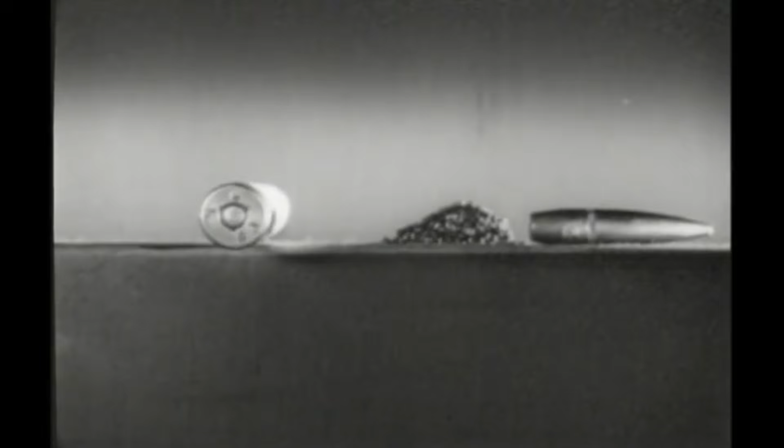This is a cartridge, the type of ammunition used in most small arms. It consists of a metal case, a bullet, a powder charge to drive the bullet, and a primer in the base to start the powder burning. A sharp tap with a pointed instrument will explode the primer, ignite the powder charge, and drive out the bullet.

To control this powerful explosion and direct the bullet toward a target is the purpose of all small arms weapons. The term small arms includes shoulder weapons, hand weapons, machine guns mounted on ground tripods, on vehicles, and planes. Some are comparatively simple. Others are complex, but there is a basic similarity which runs through them all. Since they all fire the same type of ammunition, they all function in the same general way.

In all of them, a cartridge is placed in the barrel and fired. The empty case is then removed to make room for the next cartridge. This process is called the cycle of operation, and every small arms weapon contains the mechanical means of performing it. To explain this cycle, let's construct a model weapon. It will not resemble any particular weapon, but it will include all of the basic features needed to perform the various individual steps in the cycle of operation.

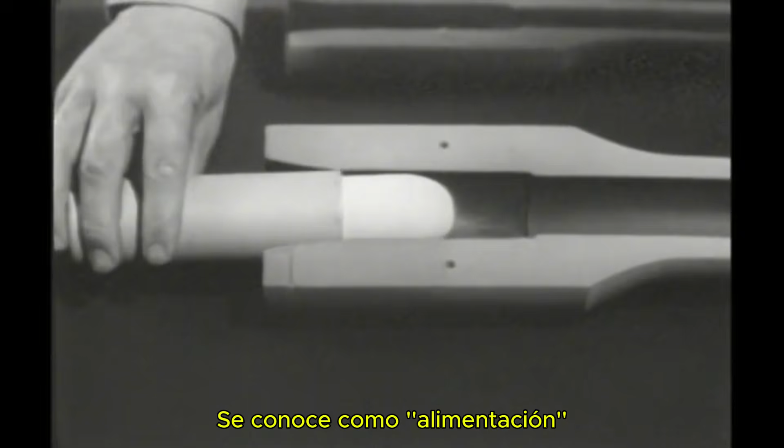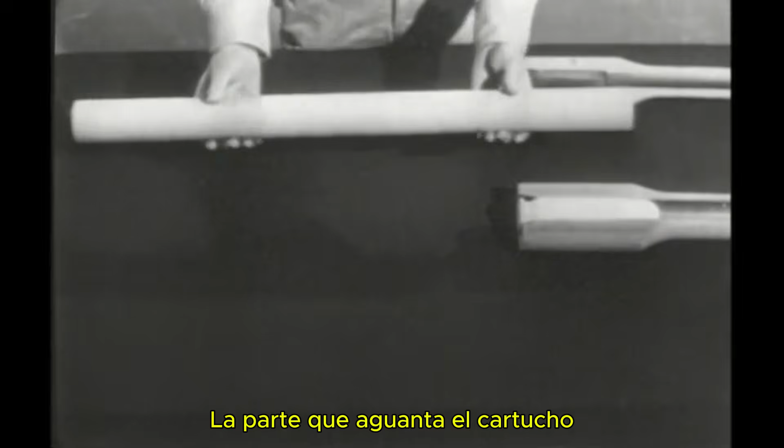A sharp tap on the primer would explode the powder charge and drive the bullet out. The same explosion would also drive the case backward out of the chamber. Therefore, the cartridge case must be held in the chamber, so most of the explosion will propel the bullet. The part which backs up the cartridge is usually known as the bolt. One end of this bolt fits against the rear of the cartridge and holds the case in place when it's fired.

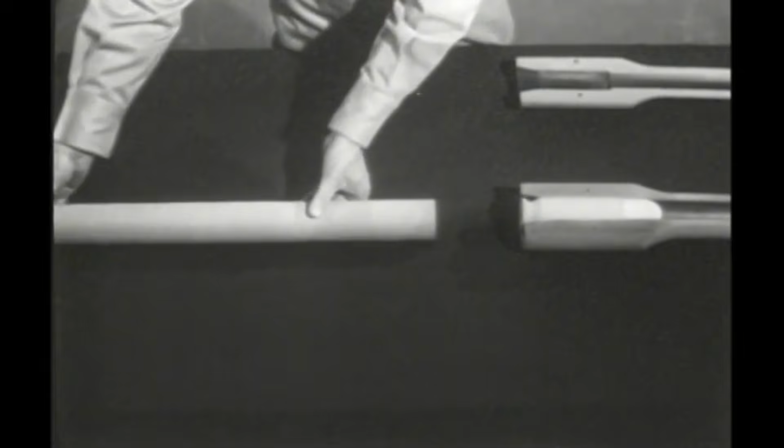In order to hold the bolt in position, we need something to support it. The barrel, too, must be held in position. The piece supporting them is known as the receiver. There is a channel in which the bolt can slide. The barrel is attached to the front end.

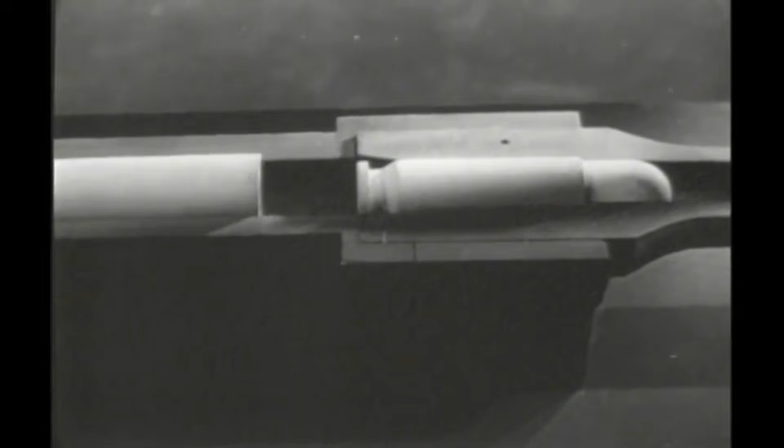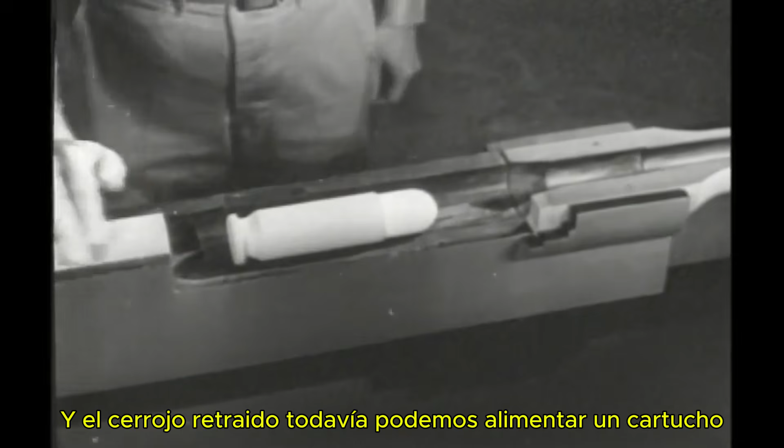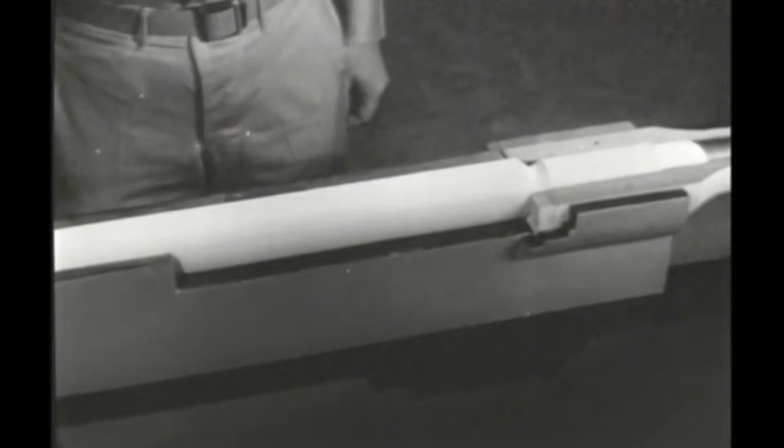With this side section removed from the receiver and the bolt back, we can still chamber a cartridge by moving the bolt forward. This takes care of the first step of the cycle of operation, chambering. Instead of depending entirely on the weight of the bolt to hold in the case when the cartridge is fired, we'll use some way of locking the bolt in place.

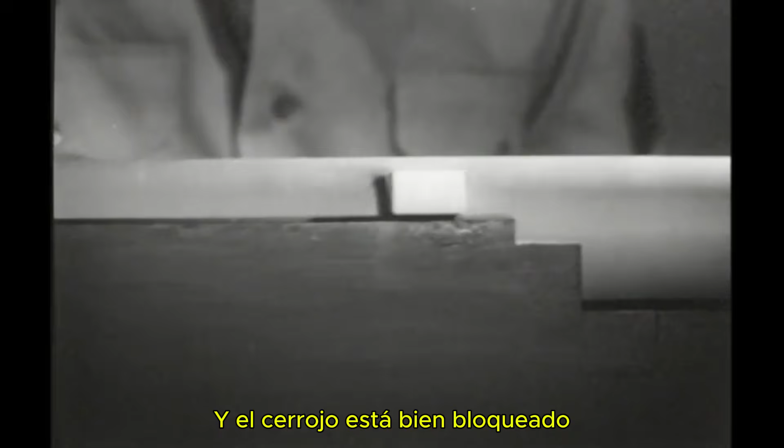The simplest way of locking is to fasten a lug to the side of the bolt. A notch is cut in the side of the receiver. When we close the bolt, we can turn it so the lug fits into the notch and the bolt is securely locked. This is the second step of the cycle of operation, locking.

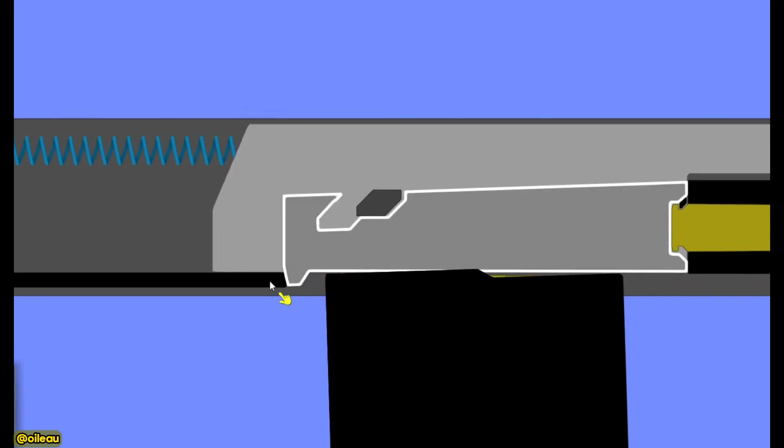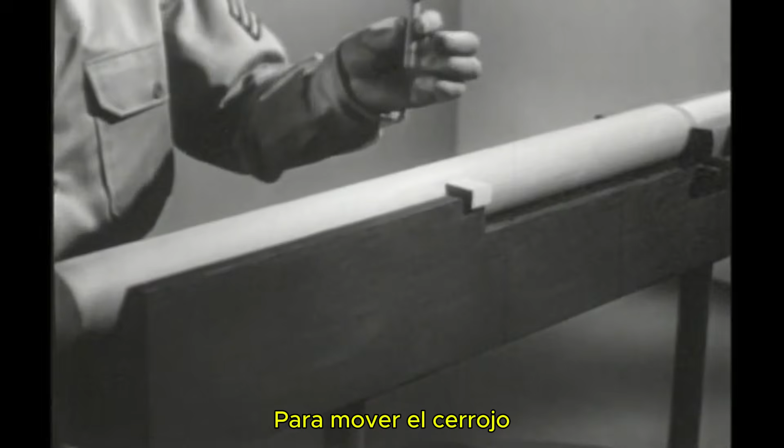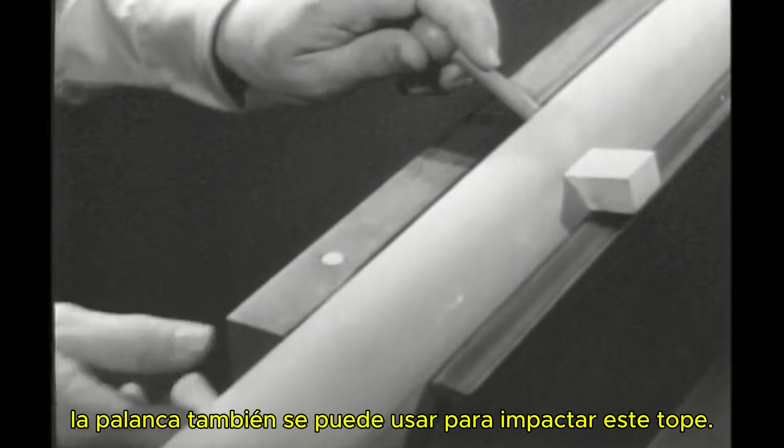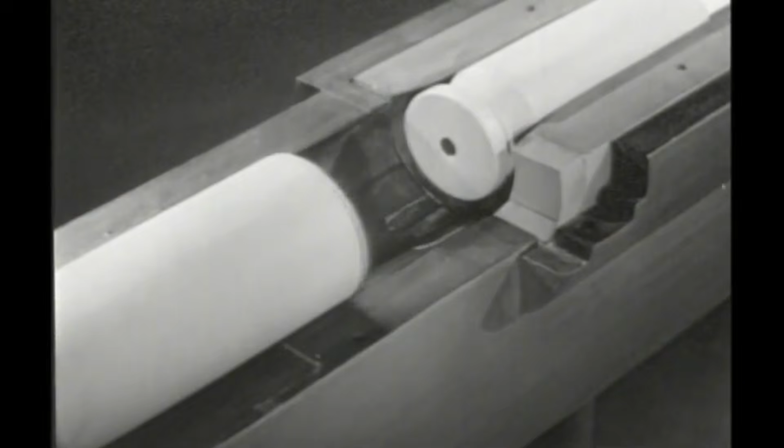It can be made easier by adding a handle to move the bolt. The handle can also be used to strike this stop. This prevents the bolt from sliding out of the receiver. With the bolt closed, how are we going to fire the cartridge? To fire the cartridge, we must strike the primer. However, the bolt is in the way. Apparently, we'll have to go through it.

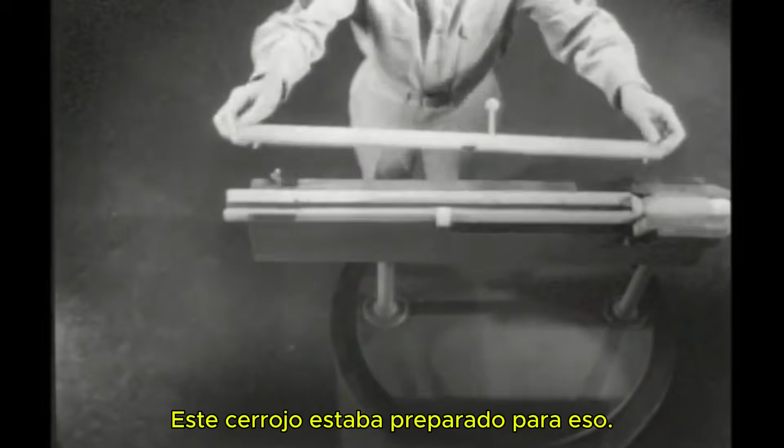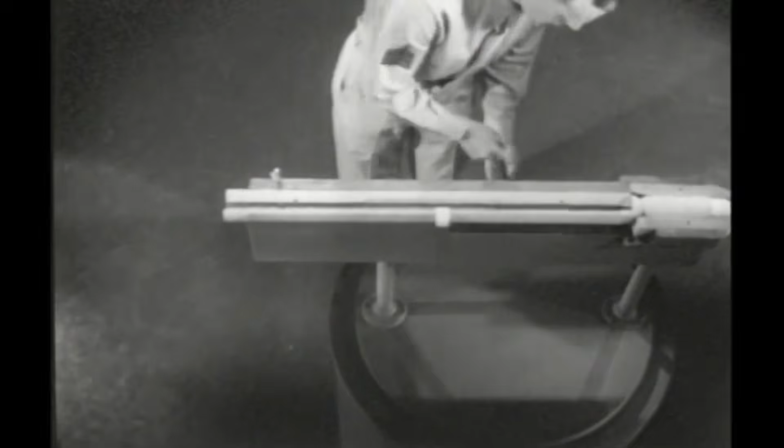This bolt was prepared for that. The top half can be removed. It has a channel running through its entire length. All that is needed is a rod to reach from one end to the other. This rod is called the firing pin. You'll notice that it is slightly longer than the bolt, so its point will extend a little beyond the face of the bolt. We can now strike the primer by driving the firing pin forward.

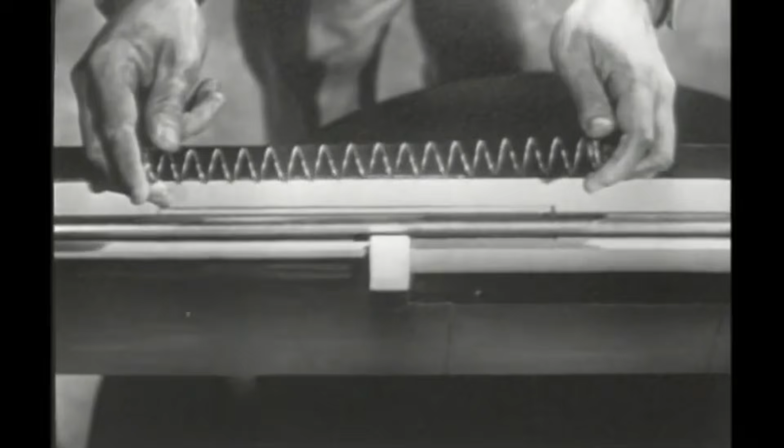One way to drive the firing pin is by using a spring. We've put the spring around the firing pin with one end against this stop. The other end is braced against this shoulder in the bolt. Now when we pull back the firing pin, the spring is compressed. When we release the pin, the spring drives it forward against the primer. This is one way of accomplishing the step known as firing.

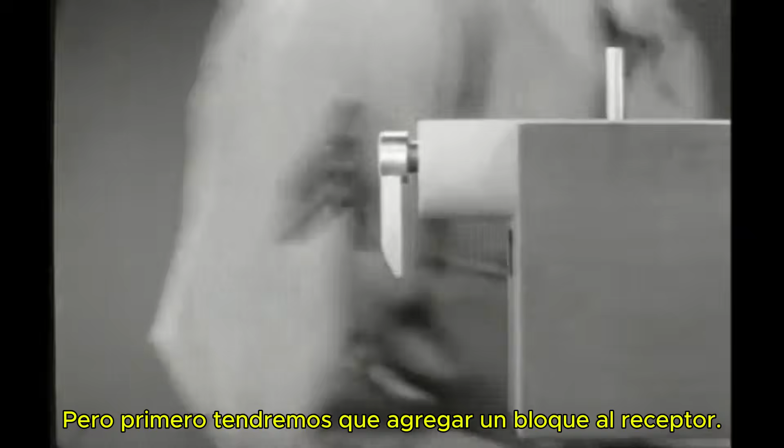However, it's awkward to pull back the pin and release it by hand each time we want to fire. We need a means of holding the pin back until we're ready to fire. This is known as cocking. Supposing we put a hook or tang on the rear end of the firing pin. We can still pull the pin back and release it by hand. Now we'll rig up something to hook it onto. But first, we'll have to add a block to the receiver to hold the parts we'll need.

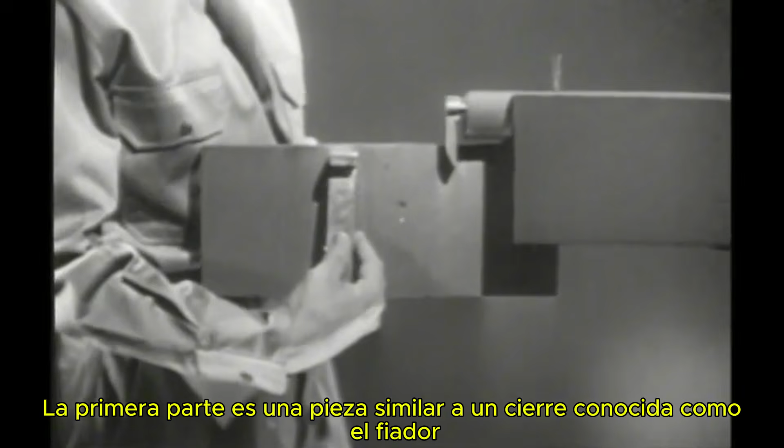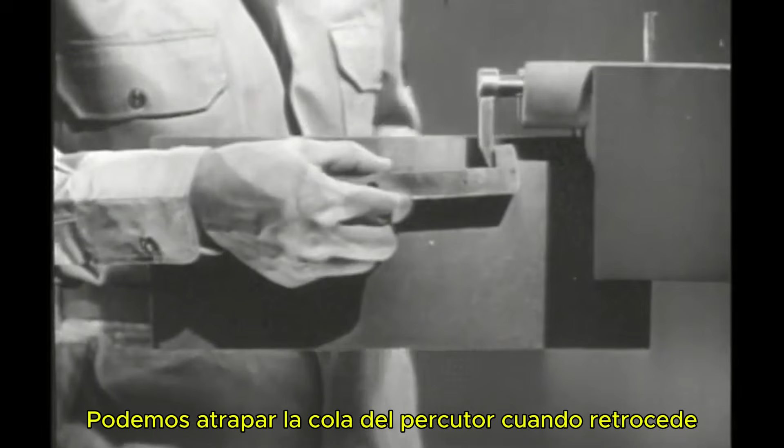The first part is a latch-like piece known as the sear. If we hold it here, under the firing pin, we can catch the tang of the pin when it's drawn back. We'll mount the sear on this pin so that it will pivot freely. We can release the firing pin by pushing down the front or nose of the sear.

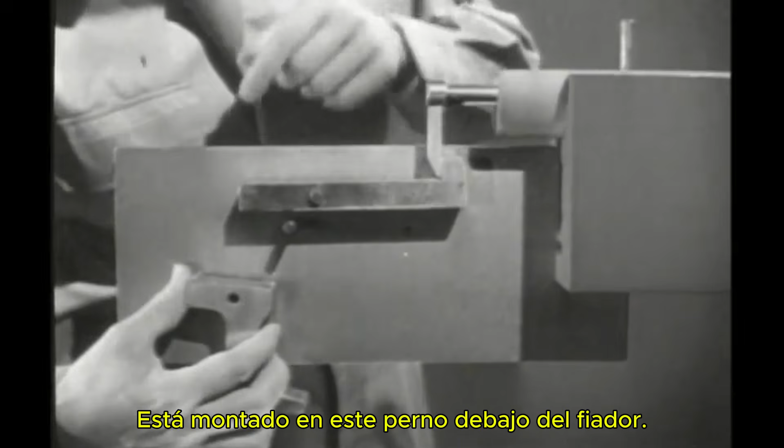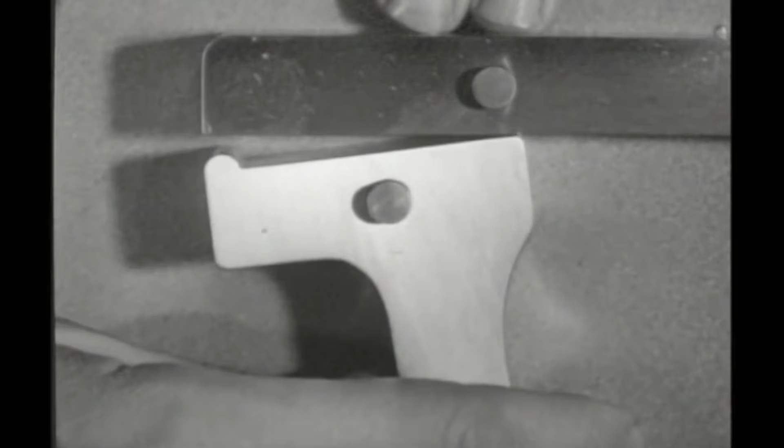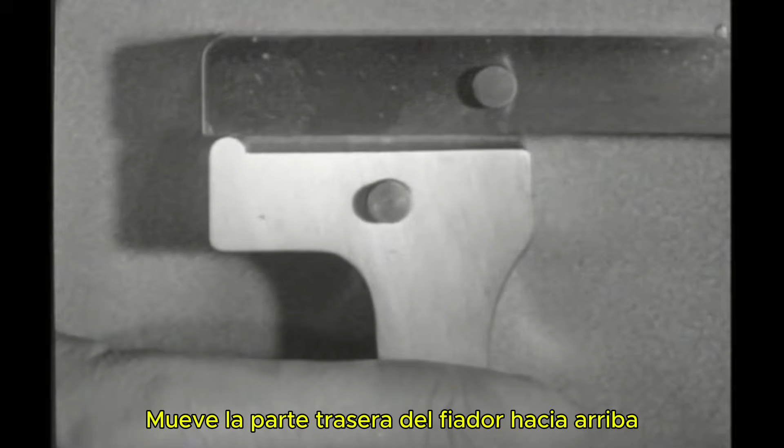This is where the trigger comes in. It's mounted on this pin underneath the sear. The trigger can now pivot back and forth. When the trigger is squeezed, it moves the rear end of the sear up. The nose of the sear moves down, and the firing pin is released. Once the sear is lowered, we have to move it back up to catch the firing pin the next time it's pulled back.

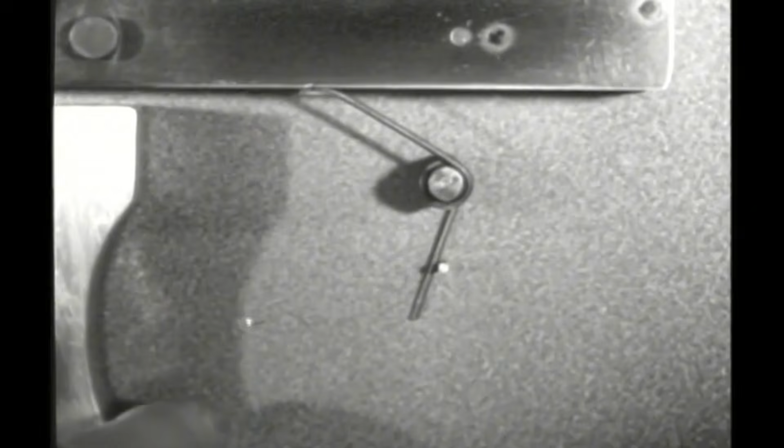That's why we need a spring, a sear spring, to push the sear up. It's installed underneath the sear. Now, when we squeeze the trigger, we lower the nose of the sear until it releases the firing pin. Then, when we let go of the trigger, the spring raises the sear nose so it will catch the firing pin when it comes back. The spring also returns the trigger to its original position.

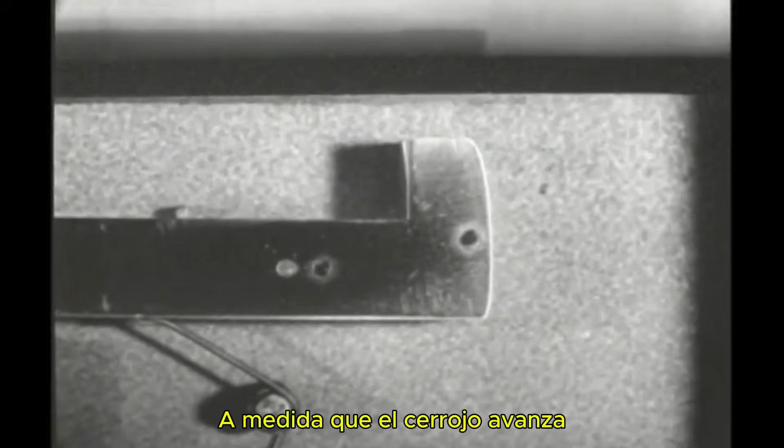We no longer have to cock the firing pin by hand. As the bolt is opened, we can cock the weapon at the same time. The firing pin tang cams the nose of the sear down, and the sear snaps back up. As the bolt moves forward, the sear catches the tang and holds it, and the piece is ready to fire. That takes care of the step known as cocking. Now we have a basic firing mechanism similar to that used on a number of small arms weapons.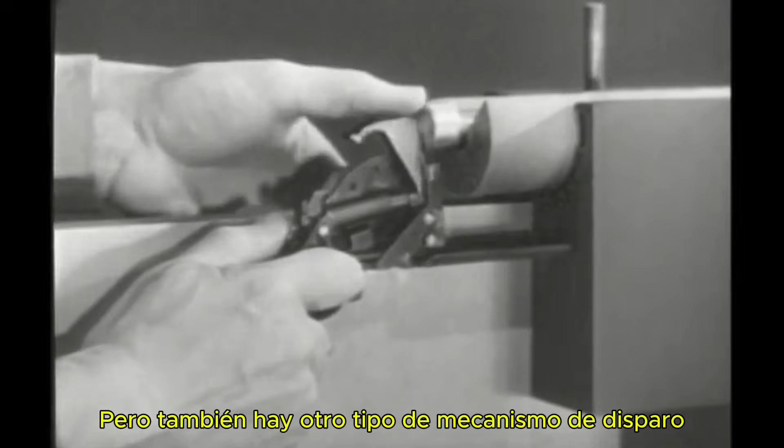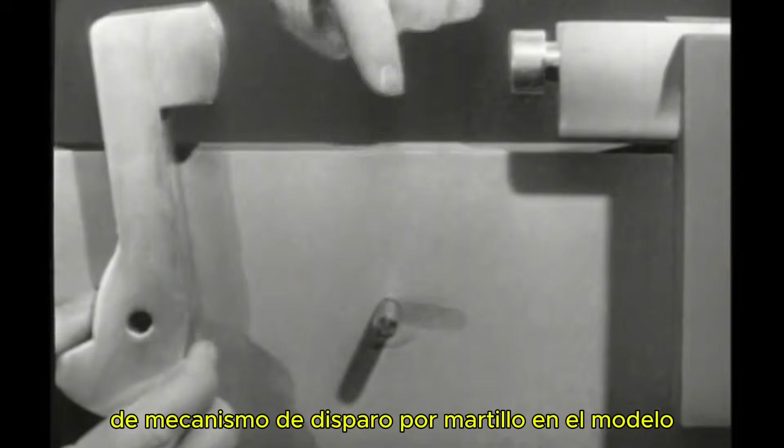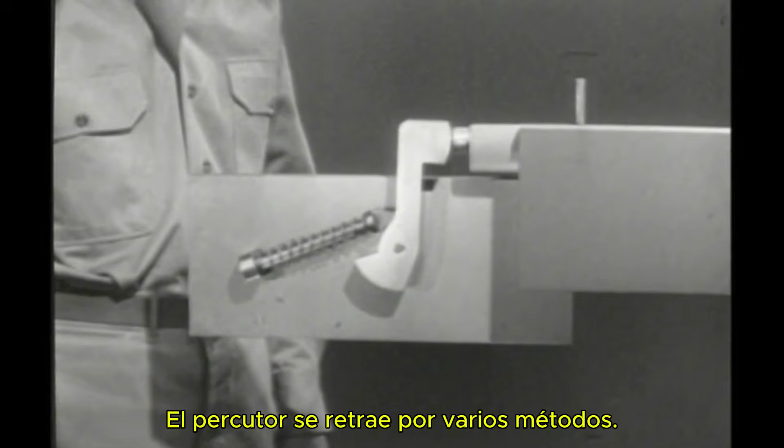But there is also another kind of firing mechanism. Some weapons use a hammer, which strikes the firing pin. We'll build this hammer type of firing mechanism on the model. First, let's attach the hammer so it can pivot and strike the firing pin. The spring was taken from around the firing pin to drive the hammer. The firing pin is retracted by various methods in different weapons, and it remains in the rear position until the weapon is fired. To guide the spring, a rod is run through it.

The front end of the spring is braced against this shoulder. The rear end of the spring is braced against this supporting block. The rod is attached to the hammer so that the spring pushes against the hammer. When the hammer is pulled back, the spring is compressed. Then the spring drives the hammer forward against the firing pin.

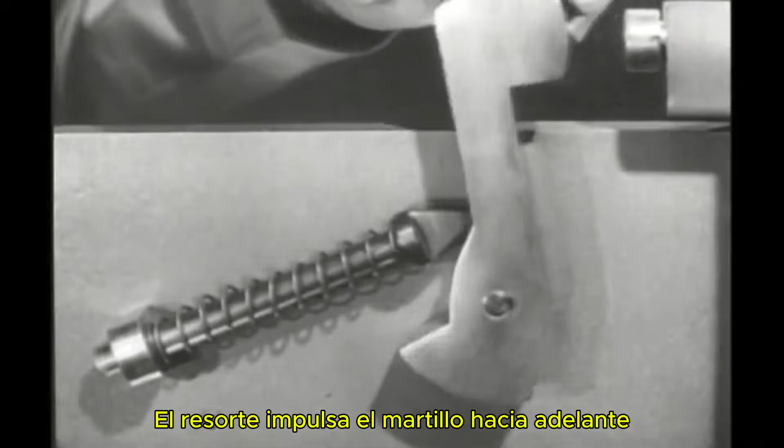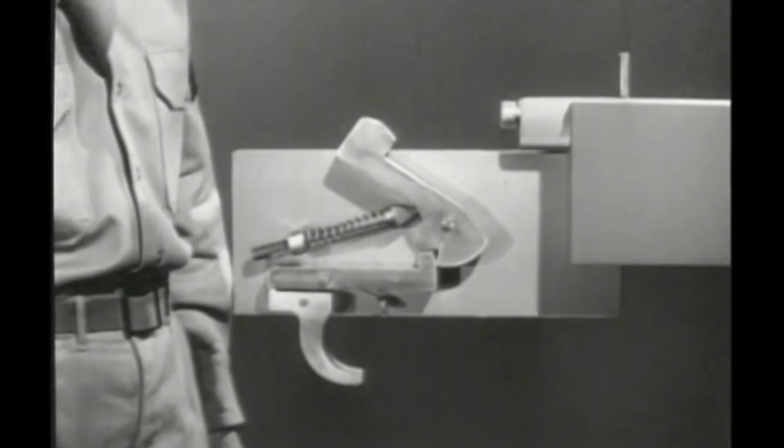To cock this firing mechanism, we can use the same sear, trigger, and sear spring that we used before. When the hammer is pulled back, the sear snaps up into this notch, and the weapon is cocked. When the trigger is squeezed, the nose of the sear slips out of the notch, and the hammer is driven forward against the firing pin. This mechanism, like the other one, can be cocked simply by opening and closing the bolt.

Squeezing the trigger fires the cartridge and sends the bullet out through the muzzle. But it also leaves us with an empty case in the chamber. Before we can get at the case, we have to perform the next step in the cycle of operation: unlocking.

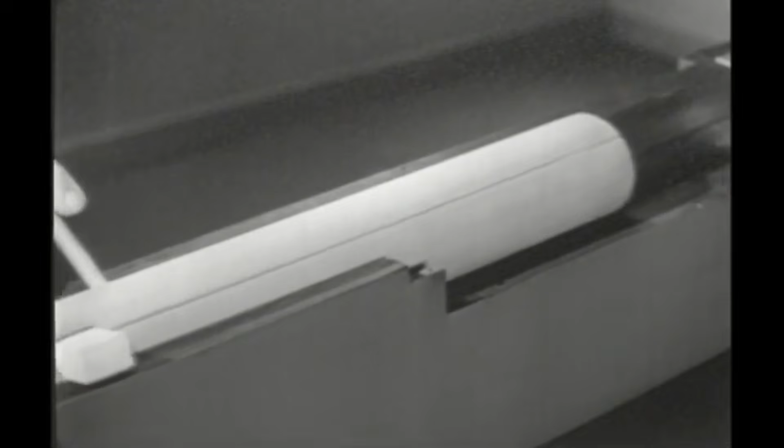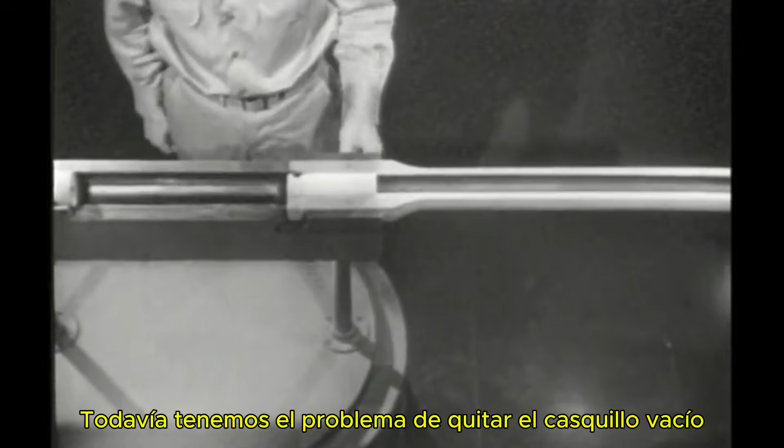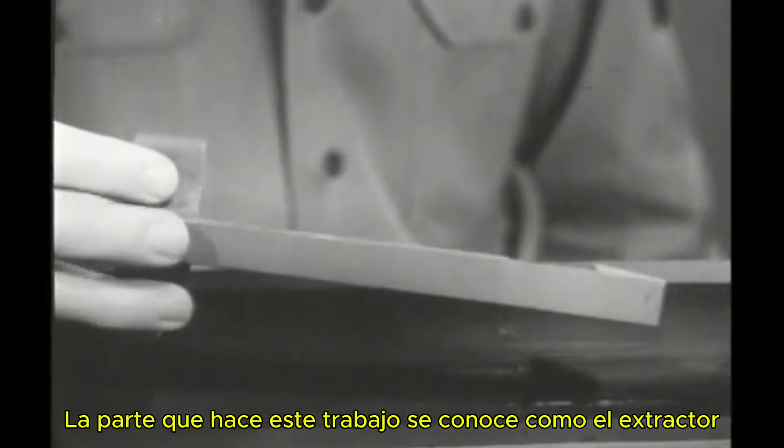We still have the problem of removing the empty case from the chamber. This is known as extraction. On a real weapon, extraction is a serious problem. When a cartridge is fired, the case expands until it's tightly wedged in the chamber. We need something to grip the case firmly and extract it when we open the bolt. The part which does this job is known as the extractor. It has a hook to grip the extracting groove in the head of the cartridge case. The extractor is attached to the front end of the bolt.

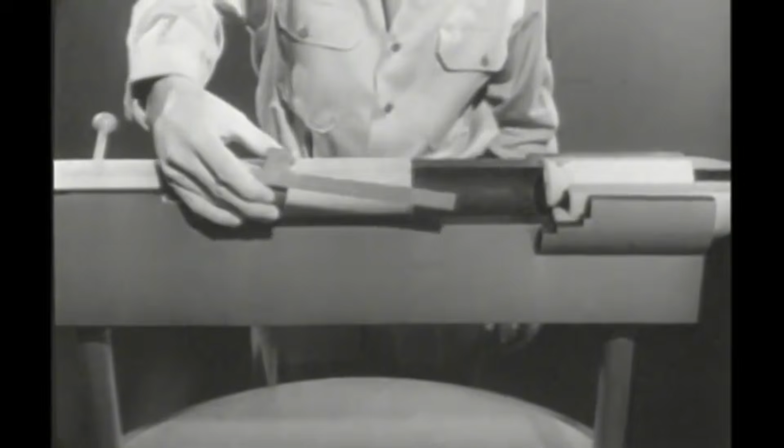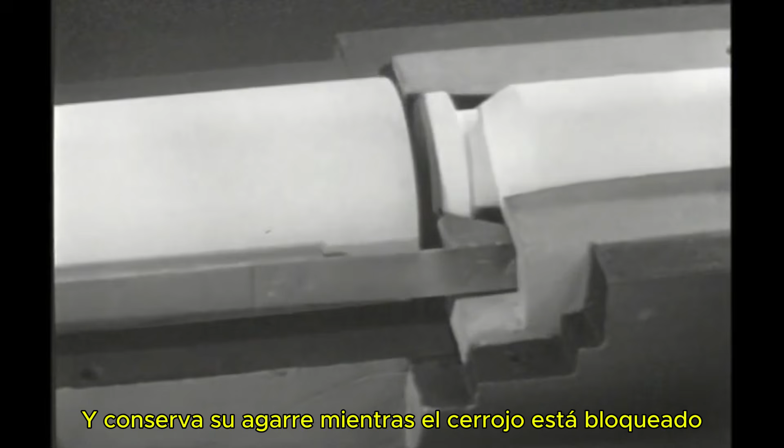As the bolt is closed, the extractor snaps into the extracting groove in the head of the case, and it retains its grip as the bolt is locked. Now, when we open the bolt, the extractor pulls the case out of the chamber.

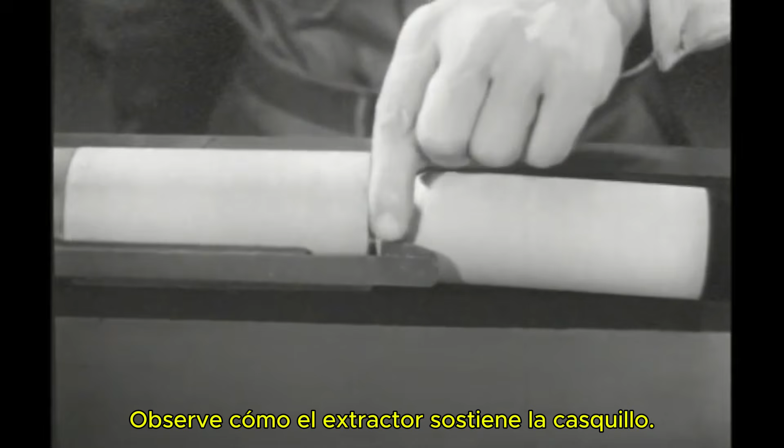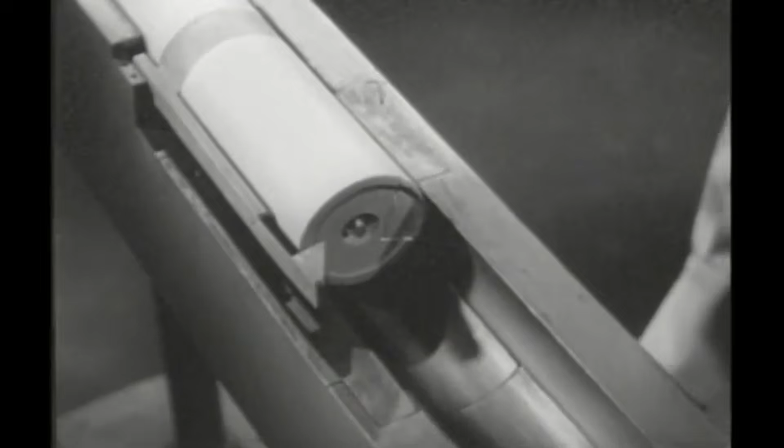Our next problem is ejection, getting the empty case out of the receiver. Notice how the case is held by the extractor. If we pry under the case on the side opposite the extractor, we can eject it from the receiver. If we take a slice off the edge of the bolt, we can get at the case more easily.

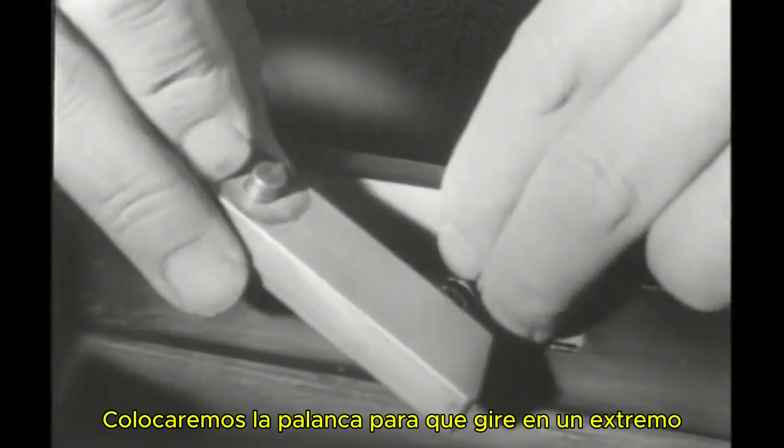Now we'll build an ejector in the side of the receiver. It consists of a small lever and a spring. We'll attach the lever so it pivots at one end with the other end held outward by the spring.

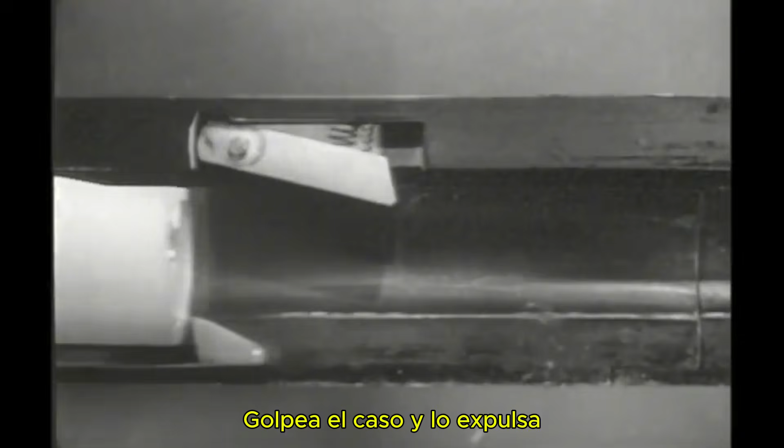When we push the bolt forward, the ejector is moved into the side of the receiver. When the case is extracted, the ejector slides into the notch, strikes the case, and ejects it. Let's watch it again.

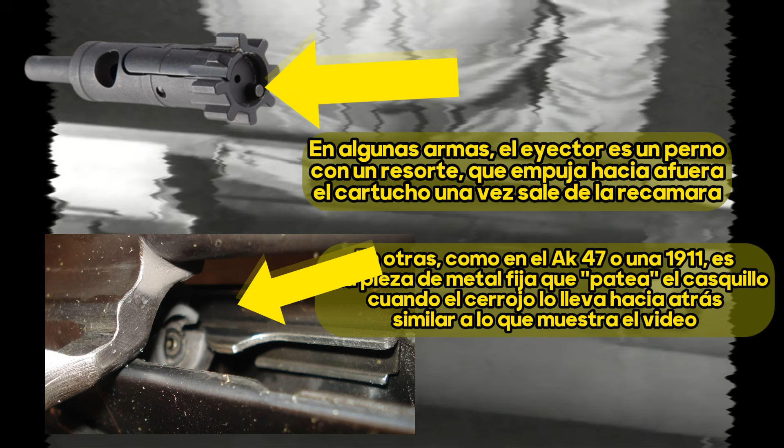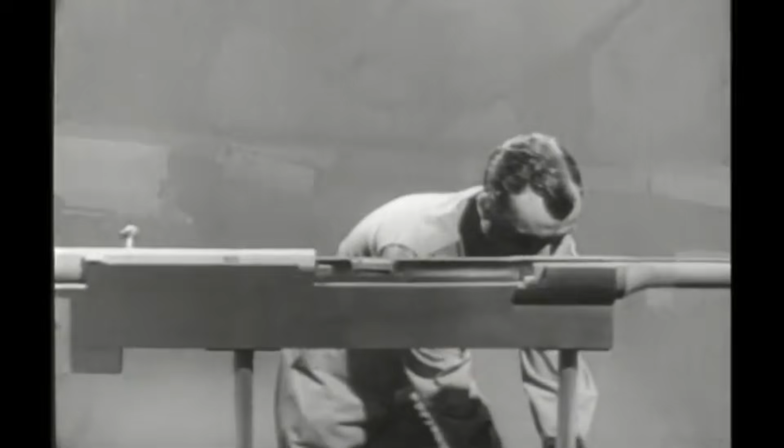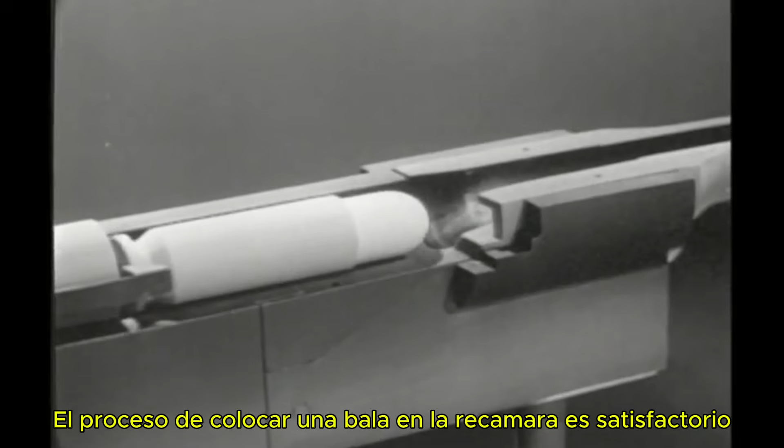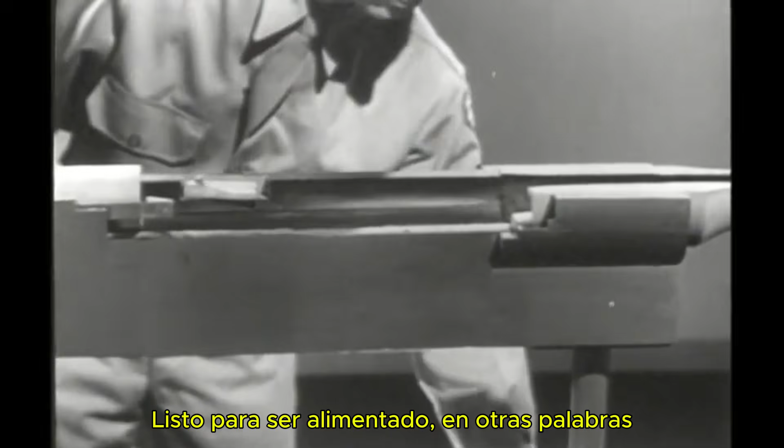Our weapon is almost complete, but we still have to feed the cartridges to it one at a time by hand. The actual chambering of the cartridge is satisfactory. The bolt moves it forward and it enters the chamber. But once the weapon is fired and the empty case ejected, we want another cartridge waiting ready to be chambered. In other words, we want some method of feeding.

There are several ways we can get feeding: by placing a clip of cartridges in the receiver, by using an ammunition belt, or by using a magazine. We'll use a magazine. One side is transparent, so we can see what's going on. Inside is a spring and this follower.

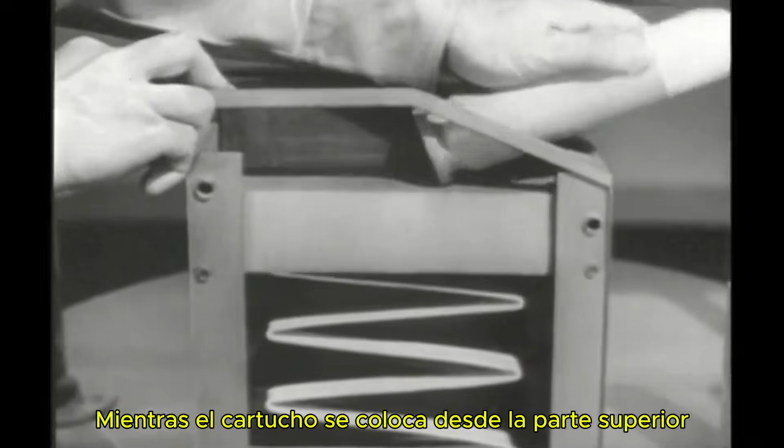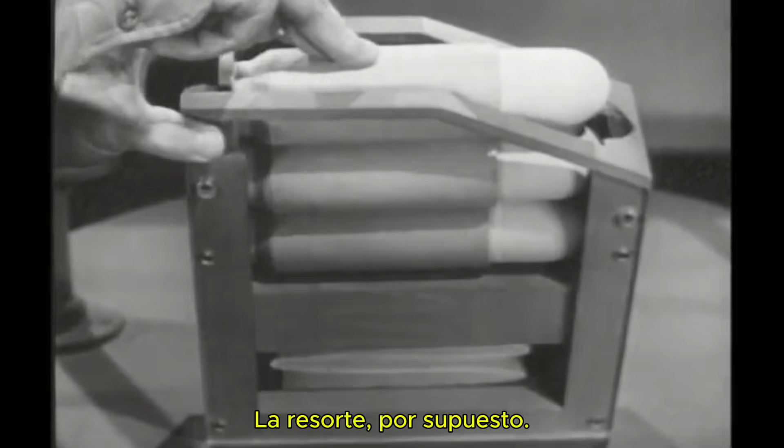As the cartridge is put in from the top, the spring is compressed. As the next round is inserted, the first one is pushed down and the spring is further compressed. The spring, of course, keeps pushing the cartridges against the top. But these lips prevent them from being pushed out.

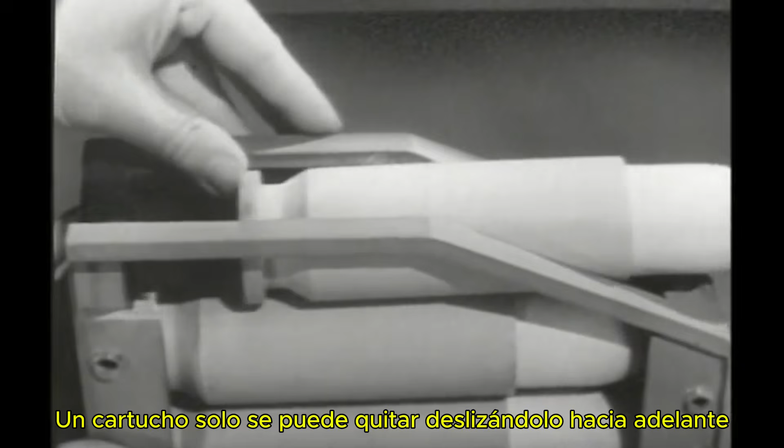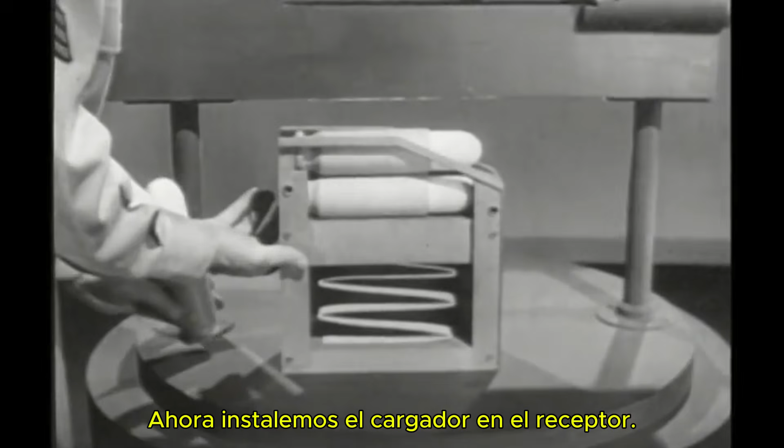A cartridge can be removed only by sliding it forward like this. And once it is removed, the spring feeds the next one up into position. Now let's install the magazine into the receiver. The magazine is placed so that the top cartridge pushes against the underside of the bolt.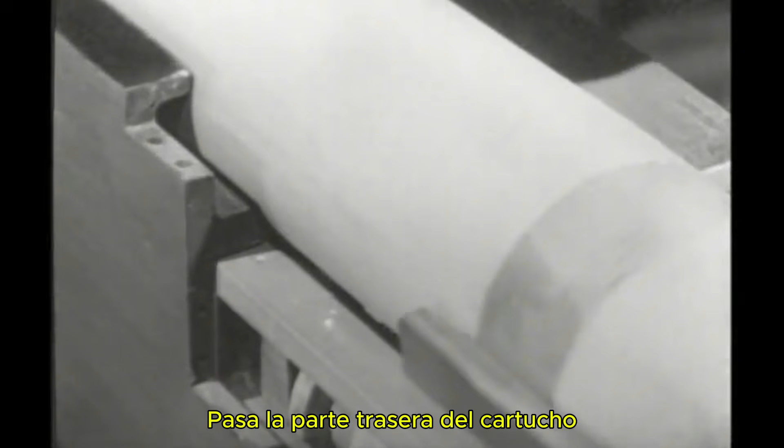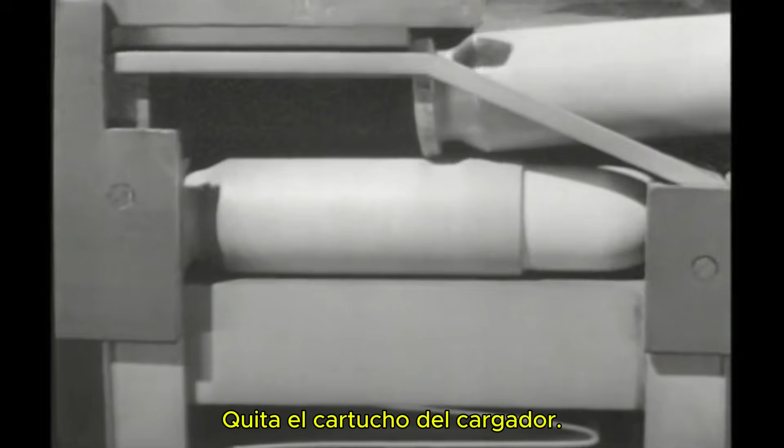When the bolt is opened, it slides back until the face of the bolt clears the rear of the cartridge. Then the cartridge is fed up into the path of the bolt. As the bolt comes forward, it strips the cartridge from the magazine and chambers it, and the spring in the magazine moves the next cartridge up into position.

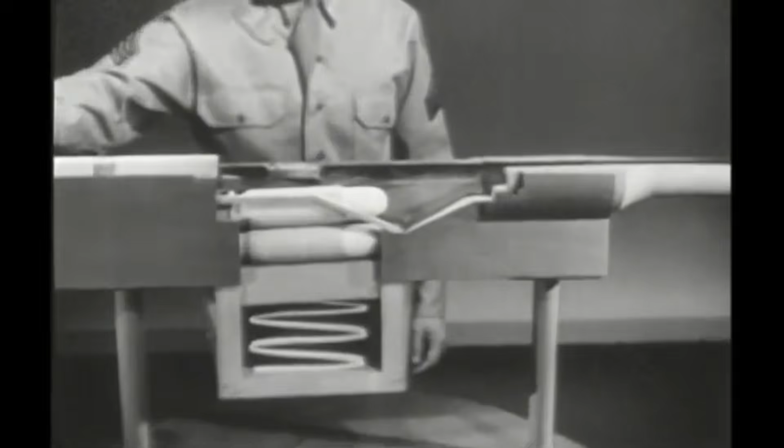Now, each time the bolt is opened, a cartridge is waiting to be chambered. That's the last step in the cycle of operation, feeding. Our basic weapon is complete. It will perform all 8 steps of the cycle of operation. Let's take them in sequence. First, there's chambering, placing the cartridge in the chamber.

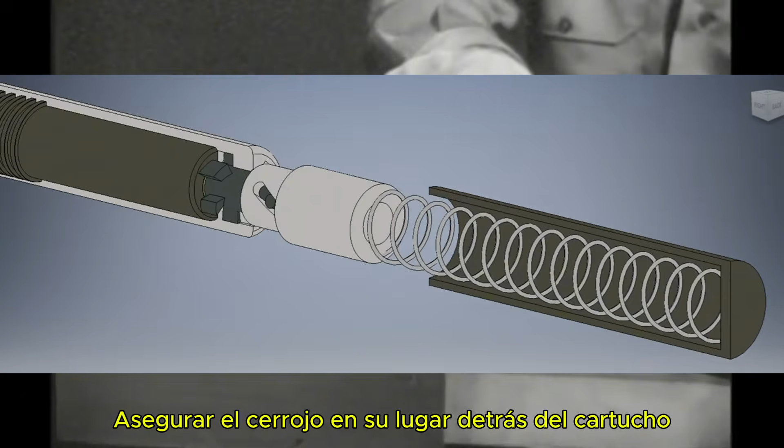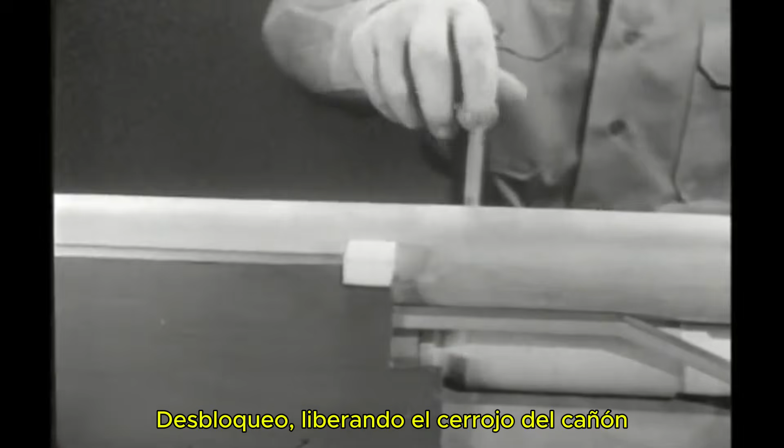Next is locking, securing the bolt in place behind the cartridge. Then firing, squeezing the trigger so the firing pin will fire the cartridge. Unlocking, freeing the bolt from the barrel. Next, extraction and ejection, withdrawing and throwing out the empty case.

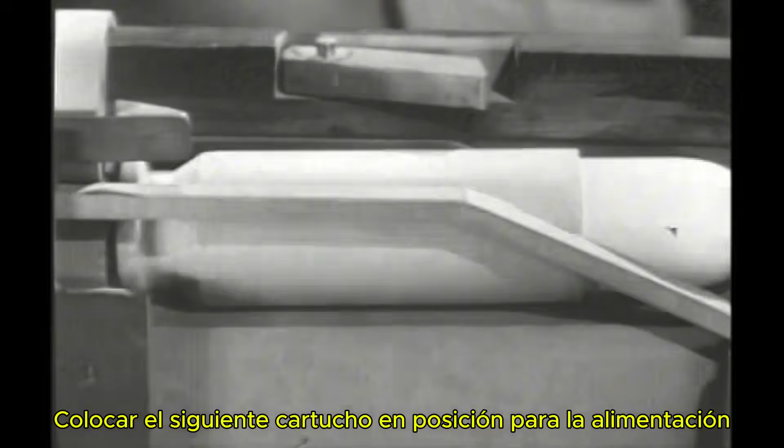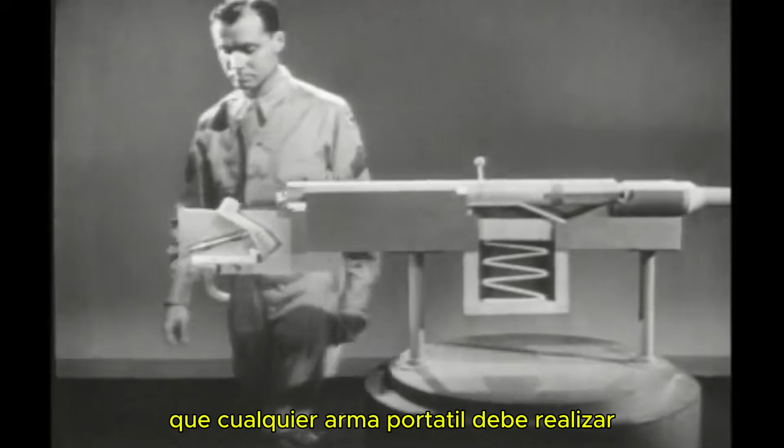At the same time, cocking, preparing the firing mechanism to fire again. And feeding, placing the next round in position for chambering. Then the cycle starts over again. These are the 8 steps any small arms weapon must perform each time it fires a cartridge.

The steps may not always come in exactly the same order, and the means of performing them may vary. But regardless of the type of weapon, all 8 steps will be performed. And once you know the cycle of operation, you've come a long way toward understanding any small arms weapon.